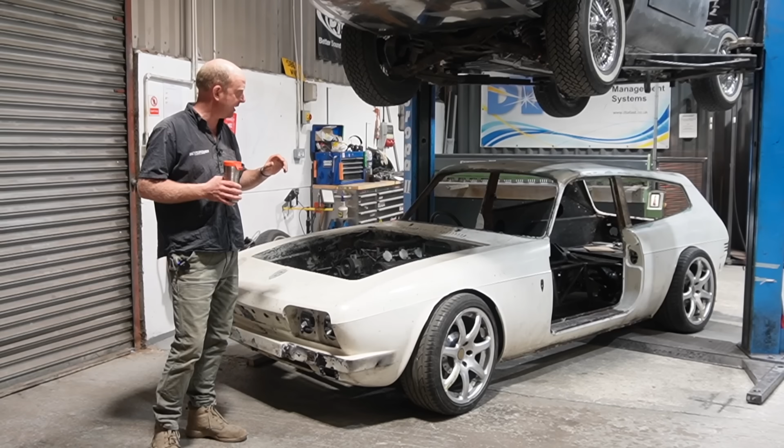The next phase of work on the Scimitar was on two fronts. One is to continue with the chassis, the second was the body.

You may recall from previous episodes we had a visit from Penta Patterns just up the road in Hinckley, to come and have a look at this body shell and give us what is known in the trade as an ROM, a useful term where nobody in this business really likes to give a quote, because a lot of the work can be quite open-ended.

However, obviously there needs to be an analysis of whether such work is vaguely within budget or not. So to deal with that, one would come up with a thing called a rough order of magnitude. And Penta have gone away and come up with an ROM for the work involved in making the parts for this body, and that ROM is within the realm of what we were hoping.

So that is good, because we were getting a little bit concerned as to the scope of building the body on this. And we now know that it is within scope, and it is within sensible scope.

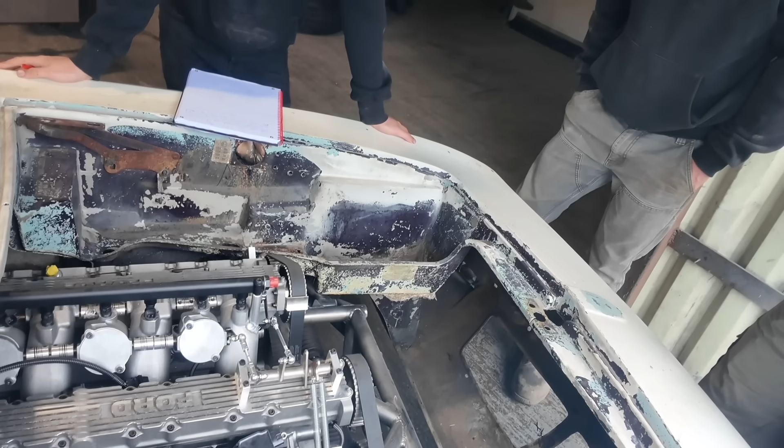So that's a really good progress point. Although it doesn't resolve anything from a viewer's point of view of things you can look at, it resolves a lot of things from our stress point of view and a forward path for the project.

So that's really good. Really the next pile of work in terms of the body relies on CAD, so that is going to be George. However, George is working on this - we'll come to that in a minute.

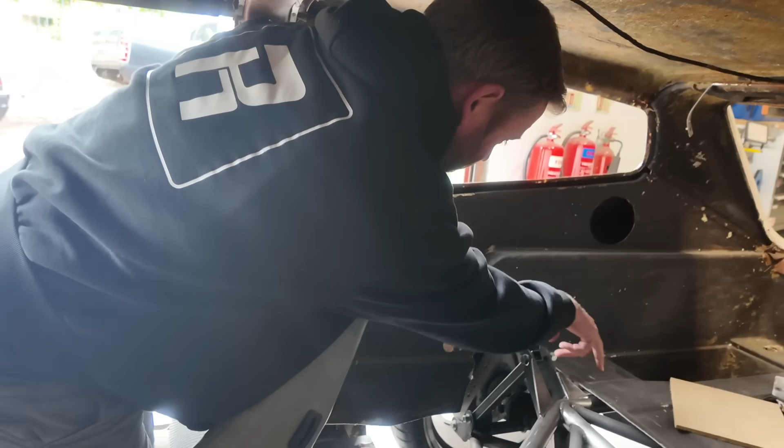Secondary to that, I need to do some work on the chassis. I wasn't rushing into it, because if the ROM had come back horrendously beyond what we had planned on the body, we'd be scratching our heads and coming up with an alternative plan. But it's not, so that's good, so I can get on with work on the chassis.

To that end, Luke has been down and done a very quick little scan in the cockpit area, because as you'll recall from previous episodes, the owners of this vehicle - there are three of them - visited.

We had them all try seating positions, and I built a very crude little support for a steering column. We fitted a gear lever and fitted a seat in a rudimentary position, just so we could trial the seating position and the pedals, and find out what was feasible, what wasn't, whether it was acceptable or not.

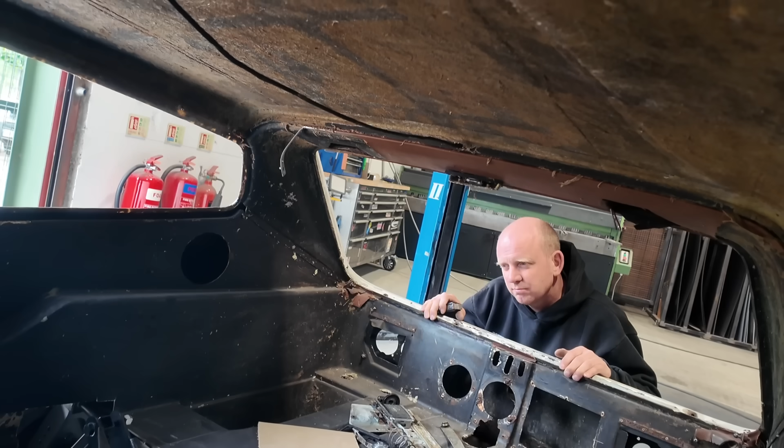That was finalised, positioned the steering wheel correctly, and now we've captured the location of those parts, the seat mountings, which are actually wooden blocks at the moment because I had to space that back up. We dropped it to suit Cal's body height and get him comfortable head clearance wise.

Actually, the owners are smaller and wanted the seat higher, so we've actually spaced the seat back up. But we've now captured the seat positions, the steering column position, the gear lever position and all the surrounding bits of car, so we've got a reference for where they need to be.

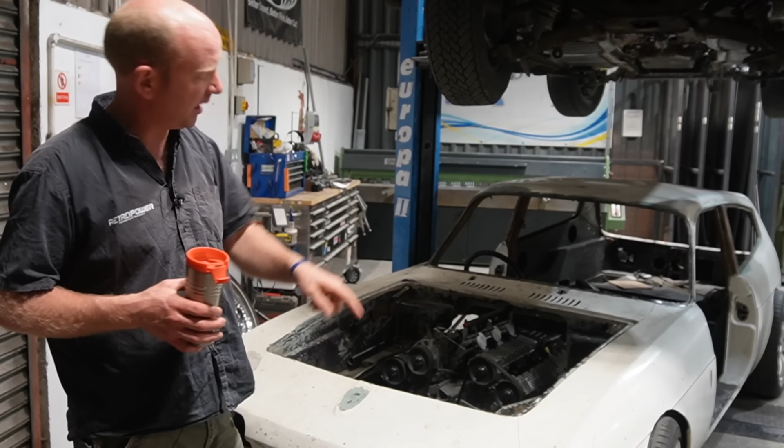Because the next phase is I'm going to be removing all of that, removing the body, removing the engine and the gearbox, removing all of the bits of running gear, and I'm going to be putting the chassis onto our fabrication table and doing some work around the modifications to the chassis.

That was always likely to be the case, and the chassis modifications are not because we're not happy with the chassis. We were in a chicken and egg situation when discussing the chassis with Ian at Sportmotive, in as much as we needed a start point, and we weren't about to design the entire car from scratch in CAD with no initial start points in place. The initial start point was always planned to be a lengthened Sportmotive TVR chassis.

There were a couple of areas where that chassis struck me that it would need modifying at the time. I could have got Ian to modify that, but I didn't know how to at the time because I didn't have an engine to trial in it. So there's a little bit of chicken and egg there.

Now we've got the chassis, we've got the body on it, we've got the engine in it, we've done the seating position trial, and we now know exactly what needs modifying. Rather than sending the chassis back to Ian and saying, can you do these modifications, it's a lot easier for me to just do them here. So it's not that the chassis is wrong, it's that it needs to evolve now we have all the parts around it. The only way we could perhaps have done that would have been to do it all in CAD to start with, but actually it made more sense to just do this.

It's changing a few tubes basically. I need to alter a couple of tubes at the front, and I need to move the lower main chassis tubes inboard slightly for the centre section and narrow it. That area is a little bit suboptimal in that we're actually narrowing the cross section of the chassis, which is going to reduce its torsional rigidity there.

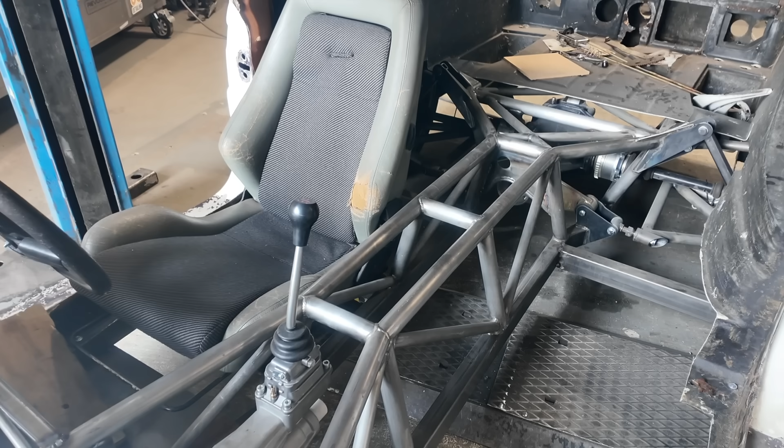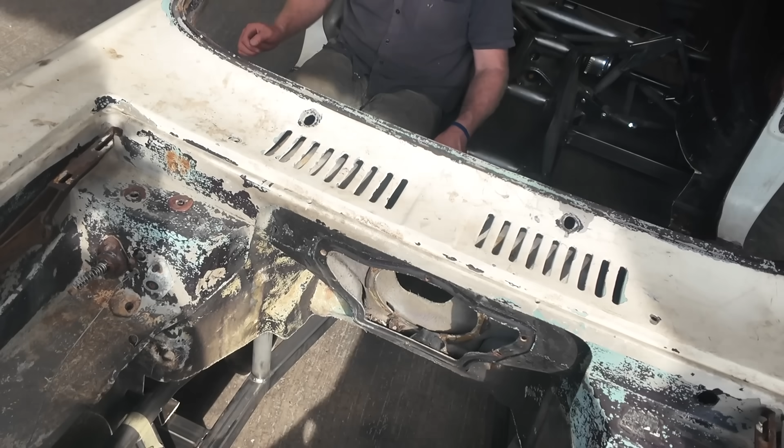However, we are going to box that section of the chassis in more than it would have been on the TVR, which will increase the torsional stiffness, and we are going to be adding the roll frame I mentioned before, and the carbon body. So actually I think we'll more than regain that torsional rigidity we're going to reduce slightly in the centre section.

So anyway, that's where we're at on that. Next week it'll be exploded into lots of pieces again and won't look like a Scimitar anymore, unfortunately, because I've got to take it apart to do that work on the chassis.

Once that's done, then the chassis is done, in inverted commas. It still needs the roll frame putting on, but the roll cage can't go on until we've got the body done, because we're going to scan the inside of the body in order to get a surface.

I think on this particular car, we're going to generate the tube work in CAD, and then have it CNC bent, because it would take me a long time with our manual bender to get the tube work close enough to the body in all the right areas. There's going to be some slightly obscure bends put in that you wouldn't normally have in a roll cage, just in order to incorporate it into this.

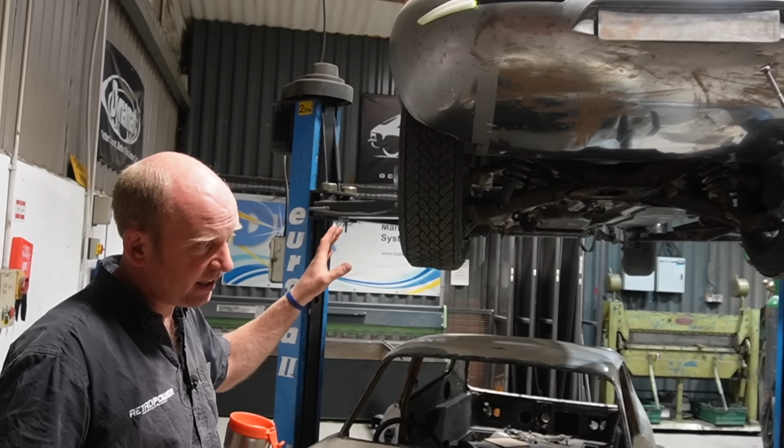That's enough of Scimitar. Moving on to E-Type. Nothing has changed in here. Lots has changed upstairs, so I'm going to shut up at that point, and Cal will hand over to George in a bit, and he'll take you through what he's been doing on that, which isn't HVAC.

Moving on from that, we'll walk past Saab. As I say, Bobby's off this week, so I'm not picking up what Bobby's doing. He was in the midst of the windscreen wiper area, which I think we touched on last week. So I'm going to sign off on that and leave it till next week when we can reappraise where everything's at.

I might get Bobby to do a bit to camera again quite soon, because I think we're all missing Bobby on camera. I've talked about everything he's been doing for quite a while, so I think he needs to do a bit himself, so we might have Bobby on camera next week.

We'll move past this Recaro seat that I've just taken out of the Scimitar and on to the E9.

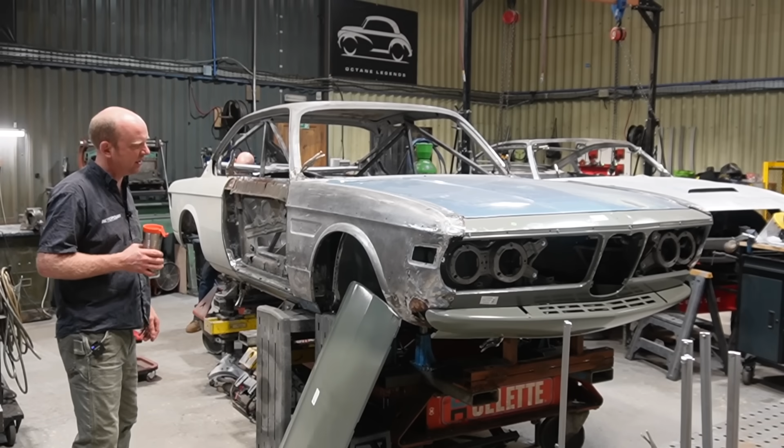There's lots of progress on lots of things here. Stu's absolutely blitzing it - he's running up to a little wall on one bit, stopping, moving on to a different bit, running up to a wall there, and moving on again. It's a multi-pronged attack to dealing with this body shell. Let me put my drink down so I can point at things better.

At the front, you'll notice from last week that he now has the front end more or less on. He reshaped this rather squashed, flimsy front panel, hence why it got squashed - no criticism of anybody, it's very hard to ship a panel like that without sustaining damage. The damage wasn't severe, it had just flattened out a bit, but given the upper and lower panels which dictate its shape, and a touch with a shrinker, that's all back to shape.

So that's all on now, though as you can see it doesn't meet this mangled pre-existing E9 very well at all. That's because lots of things need to be sorted out, most notably the front of these wings, which are in a terrible state. This car had been crashed probably several times and was quite rusty, so the front of the wings were not in a particularly good state.

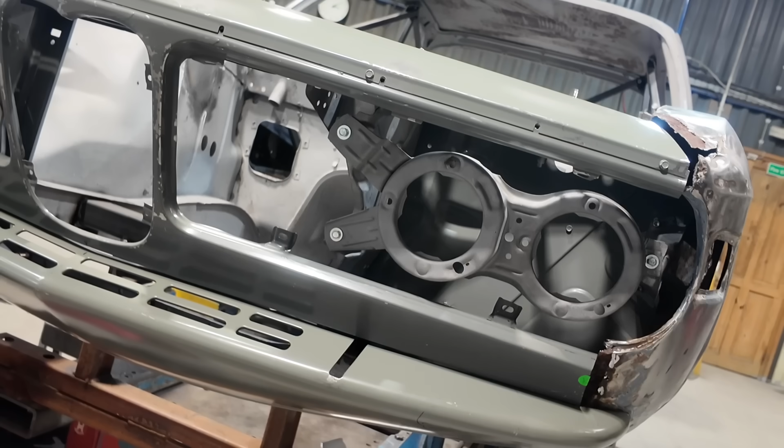In order to line this front panel area up, we need an accurate bonnet. Now this bonnet has been in several accidents, or certainly one, possibly several. However, it appears to be in reasonable condition, other than some very awkward to repair rust at the back. It appears to be the right shape.

However, putting it on and roughly aligning it, the panel gaps are not right. Stu is understandably and quite correctly concerned about trying to line up the whole front end from a bonnet which is questionable. It appears good - we all looked at it and said it looks right - however we really want to double check, so we want another bonnet. That's a slightly open-ended area at the minute, in that we don't have a replacement bonnet, and they are like hen's teeth, very difficult to get hold of.

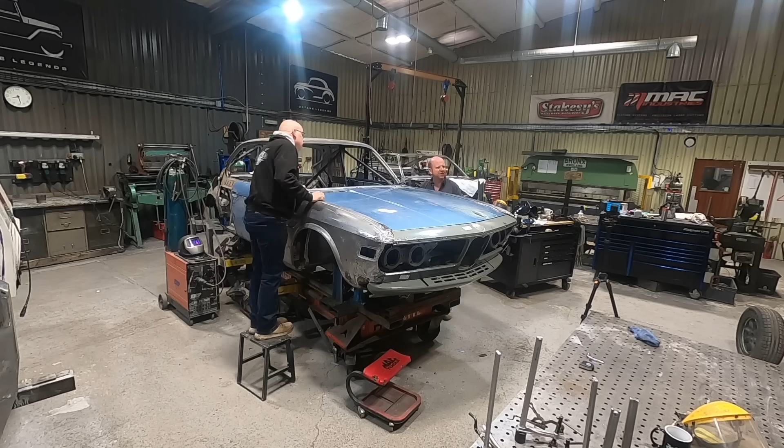Now, fibreglass and carbon fibre ones are available, but we don't know the quality level of them. A very kind viewer of ours - who I'm not going to be able to name because I haven't actually spoken to him - got in touch with Cal to say his mate, a chap by the name of Paul Baker, would be able to help us with some panels, and he has helped us. The only one missing from that is the bonnet - he doesn't actually have a spare, so we still have a dilemma there.

However, I need to make some phone calls, which I've been trying to get onto since yesterday, because there may be other possibilities there. So the reason Stu has stopped work on the front is basically because we need to secure a known good bonnet to give us the alignment for the front end panels, to make sure they're right before we fix this front panel in place and move on to the wings.

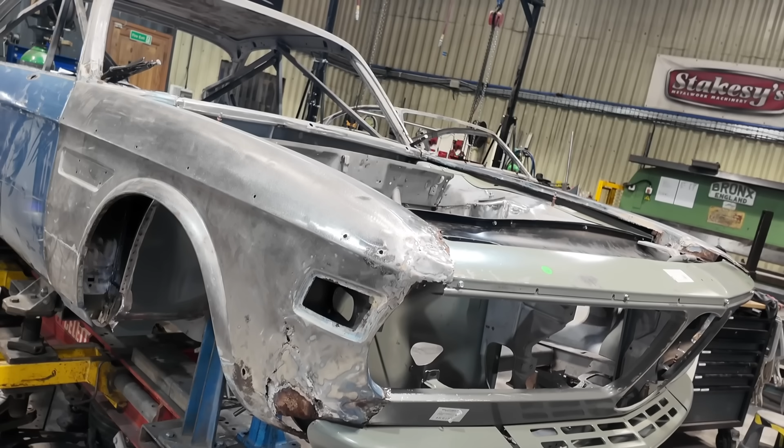Now, moving on to the wings - going back to Paul Baker, who I mentioned earlier - yesterday Martin went down to see Paul and has collected several panels, which we are extremely grateful for. And they're obviously not cheap, they're not going to be cheap - the parts for these cars are incredibly difficult to get hold of.

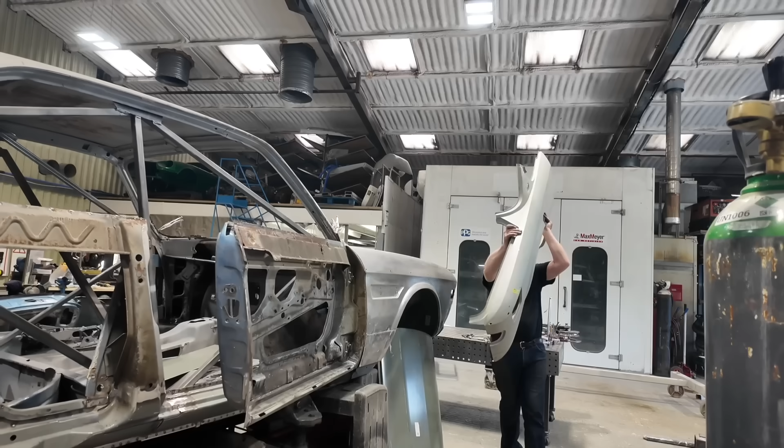But we now have a new old stock genuine offside rear quarter panel, an aluminium boot skin, and a pair of front wings - one new old stock and one basically new old stock. I don't really get the history on the other front wing - it looks like a brand new panel that was fitted to a car and then immediately removed again. It's quite strange, but it's got some little pieces let in where the welds would have been made, some sections to be welded in, but they're all in very good condition - basically as near to a brand new panel as you're likely to get.

So we now have a pair of front wings, which are great, and an offside rear quarter panel - which is the one that really was beyond saving. It was absolutely annihilated, that quarter panel. There was nothing really we could do to save that.

We haven't got a near side quarter - it would have been nice to get one. Paul couldn't help us with one of those, but the one we have is salvageable. It needs a lot of work - an arch repair section, a lower rear corner section and a lower front corner section - but it is repairable. So we now have all four corners dealt with.

The boot lid frame will go again, that's okay. We can use that with a couple of minor repairs with the aluminium boot skin from Paul, which will sort the boot lid out. It's just the bonnet we're stalled on now, so there'll be some further discussions with Paul in terms of sourcing one. Once I've spoken to another chap I'm about to try and talk to, we'll see if we can get something in the pipeline for a bonnet anyway. So irons in the fire there.

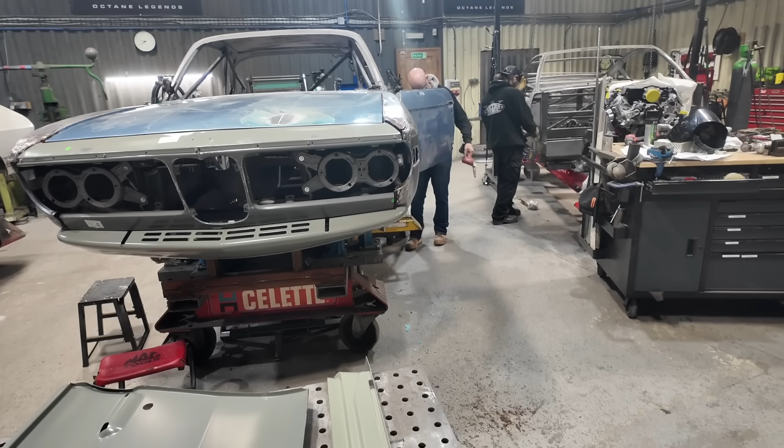So that's what's going on with the front. Moving on to what Stu has been doing - he's moved on to the doors. We've got these door skins from Walloth and Nesch in Germany, and Stu's been piling through the door repairs. This door's pretty good - he's replaced the bottom using an off-the-shelf repair section, which we're very impressed by and large with the sections from Walloth and Nesch. They seem very good, very reasonably priced, very good quality. He's replaced the bottom of this door, and I think he's also started work on the bottom of the other door now.

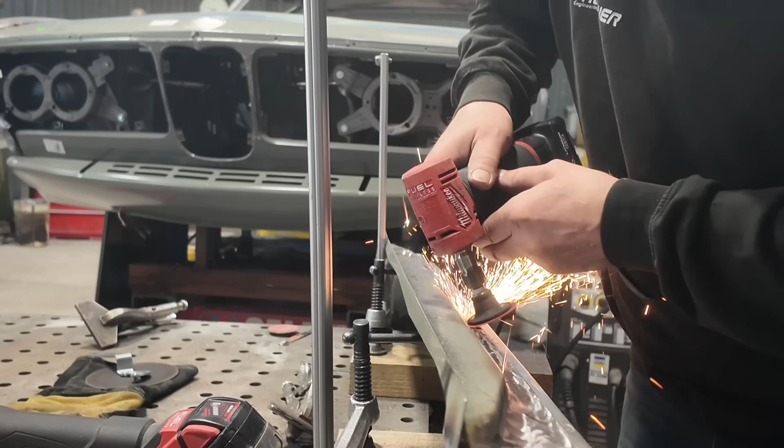But the stumbling point is that on the near side door, this top section - a good way to show it because it's here on show - this section on the other side is completely rotten nearly all the way along. We were just about to make up some little tools to put these sections in, and Cal reminded me we'd better just check whether Walloth and Nesch do them. We didn't think they would, because door frames don't normally rot, but evidently on an E9 they do normally rot.

Sure enough we can actually buy that section as a kit from Walloth and Nesch. As we needed to order a couple of other parts not in the first batch of panels, Cal has now ordered one for the other door, but also one for this side as well, because somebody's mangled this one with a drill - goodness knows what was going on, but it's had a drill thrashed through it in a random fashion. This little pad at the back, the flanges are starting to rot, and the kit for this part isn't particularly expensive. So rather than messing around with localised repairs and risking leaving bits of rust in, we're going to remove this section on this door as well - get it set up on the bench, tacked in place so it can't move, cut that out, put a new section in, put these pads in, and generally sort out any rust pitting.

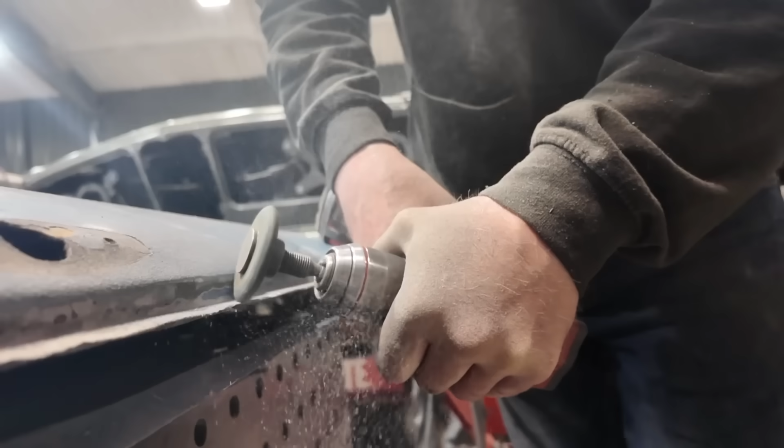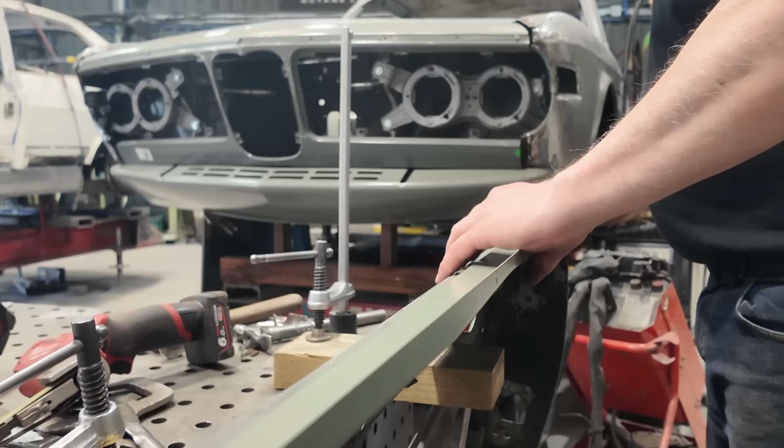Then we've got a really good door frame for both sides of the car - a really good situation, because two nice door frames is a good start point for the doors. We've got the door skins which look like they fit, the lines are all pretty good, Stu's happy there. So really good position to be in, because the outer panel work was always the concern on this car. The structural, internal stuff didn't worry us too much, but the outer panel work we knew was going to be tricky, because they're so hard and expensive to get parts for.

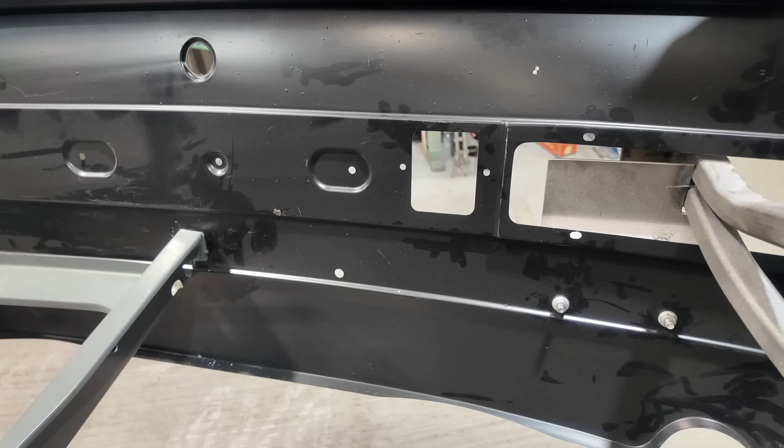Stu's now working on the rear of the car, where we've got a little bit of a hitch - not a major one - and as soon as I finish this video I'm going to ring Paul Baker. He said give him a video call, so I'm going to do that. We're just going to have a chat about the quarter to rear panel joint, because as far as I can see in the only pictures I can find on the internet, there should be a lap joint between the rear panel and the quarter panel. This new old stock quarter appears completely original, and has no lap section for the rear panel, and the rear panel has no lap section either.

Now the rear panel is an aftermarket one. I suspect they're supplied without the overlap section that should be on the ends, and we're just going to need to add that on. But I'm trying to keep it - although it's a Restomod, we're trying to keep the outer panel work as near to factory as we can, so I don't want to start modifying anything too much if I can help it, keeping it looking crisp and clean and as per original. So I want to find out how that joint should be, and whether we're missing a bit off a panel. I don't think it's the quarter, because the quarter looks exactly as per original. I suspect there's a bit missing off the end of the rear panel. But yeah, very good progress - things are coming together nicely.

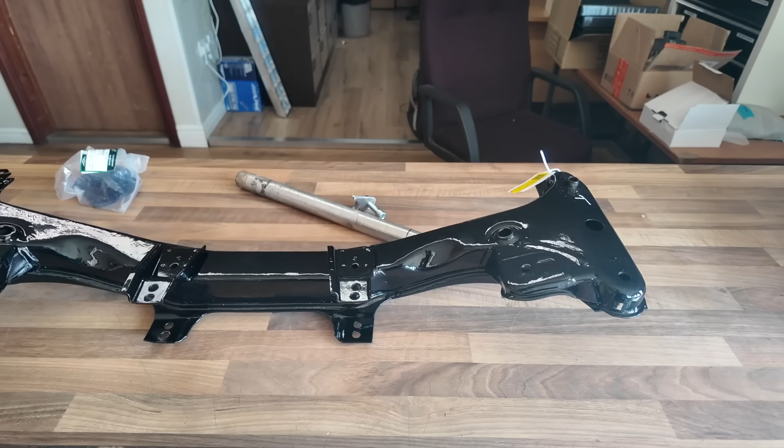Last thing on this - we've now also picked up an E30 front crossmember. We were short of one. Tim Pollock at Classic BMW Spares had one, but we didn't get it - we picked one up from somewhere else we've had various parts from before, since we were heading that direction anyway. The one from Tim's was powder coated, and I thought it seemed a bit daft to buy one already powder coated just to blast the coat off again, since we need to blast it anyway to do our zinc metal spray. Didn't want to buy an already powder coated one that he could sell to someone to bolt straight onto a car, when we're going to blast it.

However, the other E30 one we got turned out not to be an E30 one at all - it was actually an E36 one that had been fitted to an E30. So we've gone back down to Tim and picked up the E30 powder coated one, which we'll use for now. So you'll see a nice powder coated crossmember going on this car soon, which will have the powder coat blasted back off when we get to doing all the underside work. So that's where we're at with running gear and outside panels.

Really the next stage in terms of structural and running gear is the rear end - getting the rear dampers, the rear coilovers, which are the E28/E34 type, fitted and working out how we'll do the rear turrets, because we're modifying the original ones. We have to cut a much bigger hole through the rear chassis leg and rear inner wing to fit a bigger turret, which I think will come right up to the parcel shelf area, tying into the parcel shelf and rear bulkhead, and probably adding tubular bracing in the boot area, because these cars were notoriously weak at the rear end - tying the turrets into the rear bulkhead and parcel shelf structure, and into the rear differential mounting, to strengthen all that area up.

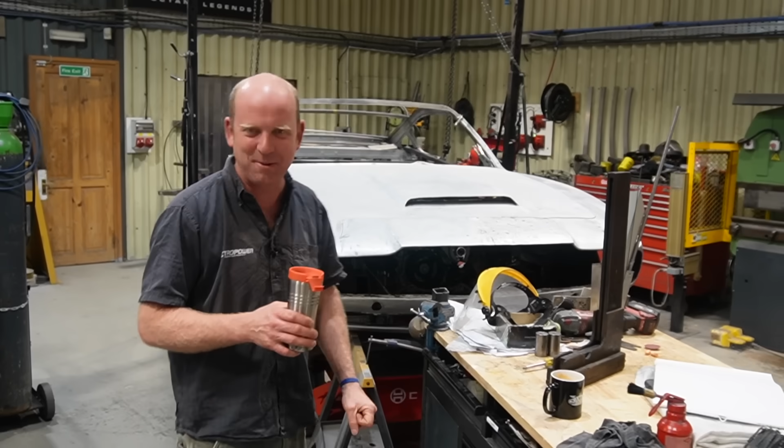And onto the Aston Martin.

As I say, Matthew is currently at a very wet Ashby Magna steam rally, having had a Land Rover breakdown on the way there, and he's got his little tractor on the back on his trailer. From the last message I saw from him, he's just cracked into his ciders to alleviate the feel of the rainfall, but I think the weather is supposed to be cheering up, so he'll be happy about that, and there'll be a lot of steam engines rolling up. I think a few of his mates are turning up in rollers - he showed me a picture of one of his mates' Invicta steam rollers that's turning up there, that he's roading over there. So he'll be having some fun. I think a couple of us are hoping to go over on Sunday, but we'll see. I've potentially got a house move on the cards fairly soon as well, so we've got quite a lot on.

Anyway, on to the Aston Martin.

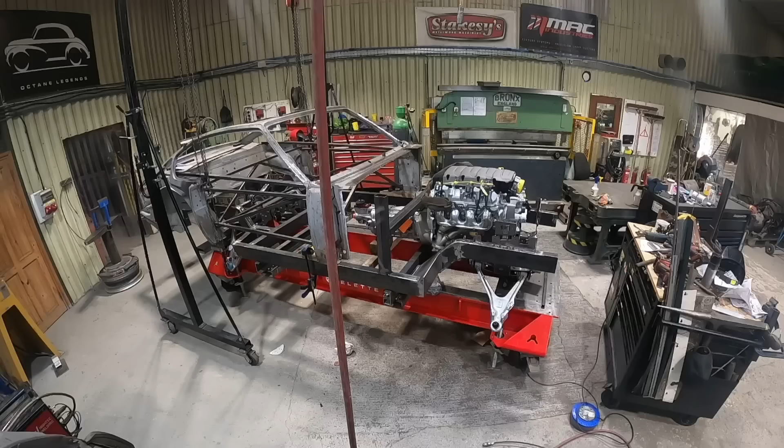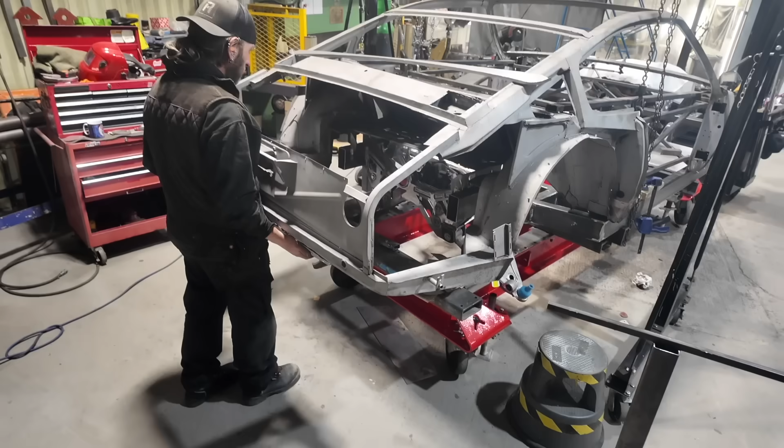As you can see, it's got some sort of bodywork and some very strange wheels on it. There's reason behind all of this - the chassis is basically at the point where we could bolt all the suspension on and get it rolling. We now need to absolutely and very carefully finalise the position of the body tub, the original Aston body tub, onto that chassis. If we get that wrong, we'll have a problem, and the wheels will be in the wrong places, because they're dictated by the chassis.

The body has the wheel coverings, the wings and the quarter panels attached to it. If we get that in the wrong place, the wheels won't be in the middle of the arches. We've got the CAD, we've got the scan data, we have lots of things digitally, but none of those quite substitute actually having a look and seeing the real parts in front of you. Sometimes it's best to just double check these things if you can.

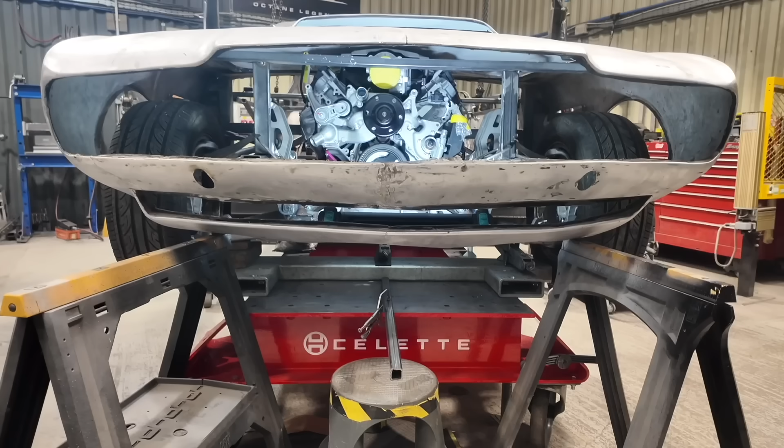To that end, we've picked the Aston aluminium bodywork down from the mezzanine. Obviously ignore the front panel, it's a terrible state - remember, we have a replacement for this waiting to be grafted in that we got from ASR Motor Body Engineering. The bonnet's absolutely mullered too, needing a huge amount of repair work, so don't pay too much attention to that either. But underneath that bonnet, we have a Chevy LT1 engine nestling in there, and the Tremec transmission, and the front suspension all bolted on.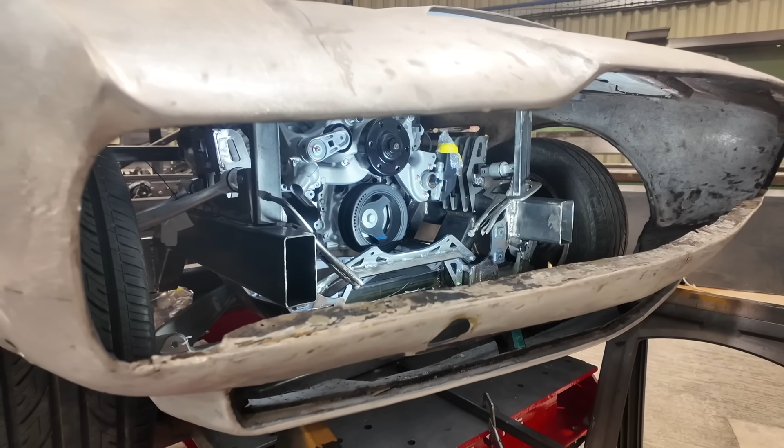So, Corvette C7 front uprights, which don't really fit inside these 16-inch Jaguar wheels - they kind of hit the upper ball joint, but they are basically on. We have C7 uprights, C7 upper and lower wishbones, all bolted on in place. Everything went together fine, all as you'd expect.

We've now put the front bodywork on, and we now need to move the body forward by around 10 millimeters. Going straight into the detail, within the CAD and scan data, there's a little bit of an error. We don't exactly know where that error's from - probably the scan stage, I'd say, given that the body shell we were scanning was pretty poorly. So we've got about a 5 millimeter difference between front and back, a total of a 10 millimeter error, and we need to average that error out.

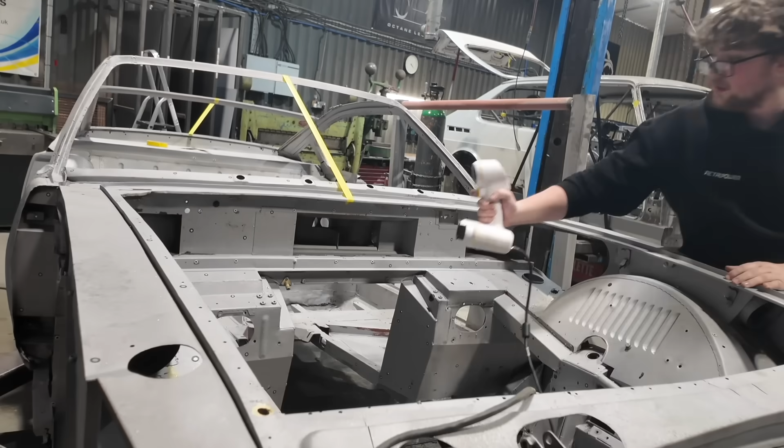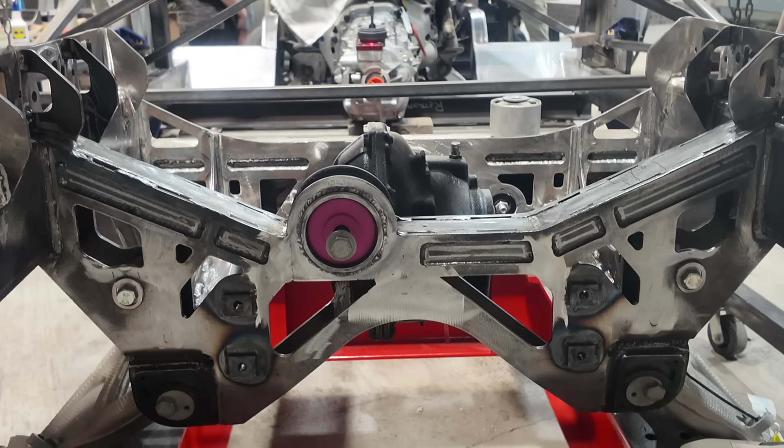At the moment, the body isn't fitted, it's just resting on - but it's resting about 10 millimeters further back than it should. So we need to deal with that. To do so, we actually need to slightly modify the H frame, which supports the A pillars, the dashboard, the bulkhead and the pedal box - a frame of 75 by 50 millimeter box section. That needs to be moved forward by about 10 millimeters, because it was mounted based on the forward half of the data, if you like, and so to average out those errors, we need to move that box section forward a little bit.

Once that's moved, we were going to sink that box section into the structure of the forward edge of the A-pillar, but the A-pillar structure becomes pretty complicated in that area. It's actually going to prove easier to just move that frame forward slightly, the crossbar up very slightly, and then move the body forward slightly, and everything should line up.

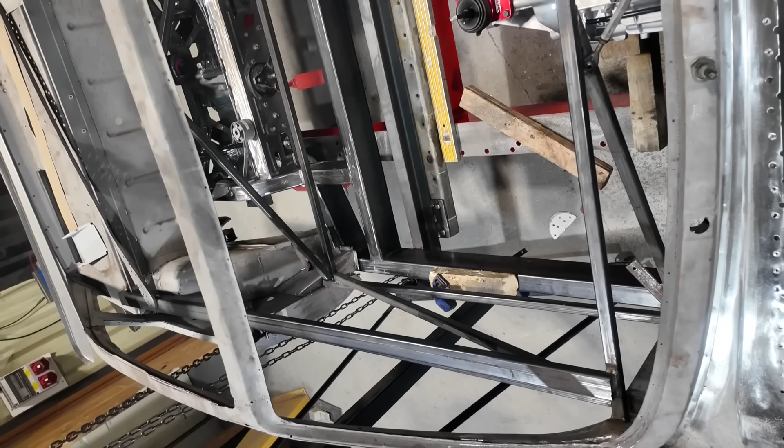Once we've done that, we're going to get the body clamped in place, and then on one side at the back we're going to cut out the rear inner arch. We've been hesitating to do that because it'll weaken the back of the body a lot. However, once that's in the correct place, we have a support in under there to carry the back of the body. Once that's tack welded in place, we can then cut out the rear arch, which will then mean we can fit the Corvette upper wishbones.

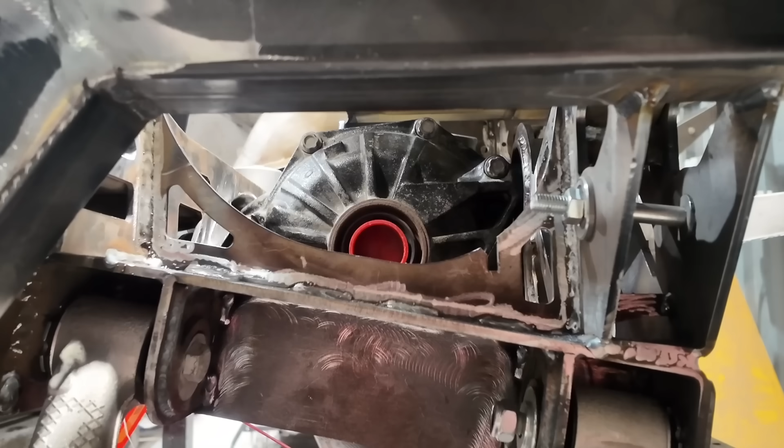We've already got the Corvette lower wishbones fitted. We can fit the rear uprights, fit a rear hub and wheel, and then put the rear aluminium bodywork on and verify that the wheels are all sitting exactly correctly in the wheel arches and that there's no unexpected things.

None of this is a massive problem. It's just making sure there's nothing unexpected and that the CAD hasn't led us down the garden path by a scan or CAD or things. It's better to put it actually in the flesh and double check. So we're going to do that.

Once we're certain that's all correct, the aluminium bodywork will all come back off again. We can get rid of the horrible Jaguar wheels again out of the way, and then we can get on with all of the rear end fabrication, which I'm really looking forward to.

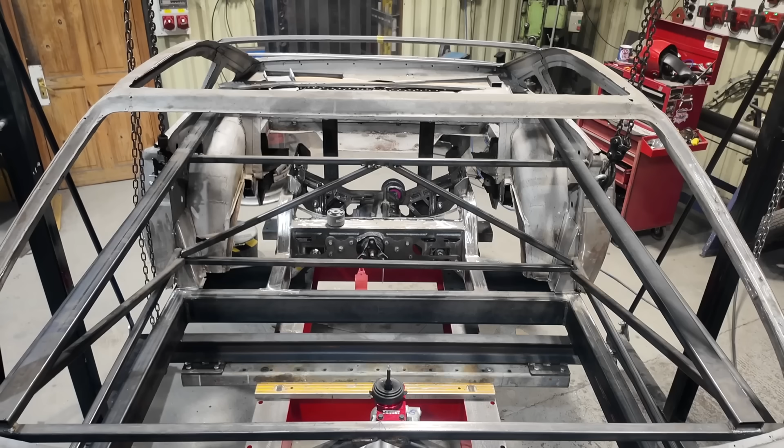Actually getting this body attached to the chassis and getting onto some of the sheet metal work and starting to make it look like a car and less like a climbing frame, because it's just not a very pretty thing to look at with all that box section welded amongst it at the moment. Also removing some of the horrendous Jaguar factory metalwork from the back would actually be quite nice, because some of the welding is just an offence to the eyes. It's really not very nice.

So we're going to remove the rear tubs. Matt's already removed the rear bulkhead section. We'll remove the remains of the rear chassis rails that go to the rear panel, remove the rear valance, rear panel, basically remove pretty much the whole rear end.

And we're going to fabricate new tubs, which won't have splits and welds all the way around them, a new rear bulkhead, new chassis rail extensions from the new chassis out to the rear corners and to pick up the rear panel. It'll all be nice new metal, nice new shapes, pretty stuff done neatly, nice reinforcing beads, and just some nicely thought out sheet metal work going on in there. So that should all come together very nicely.

Moving on from that, in the body prep area, Gaz is working his way through. He's been doing some other little tasks as well, but he's working his way through the flat and polish of the Jag, and I think he's pretty much got, other than one front wing by the looks of it, he's pretty much there with all of the flatting now. He's pretty much getting to the stages of polishing when he will be sealing himself up at this end, sealing off all the workshop grit from in there and getting through mopping it all.

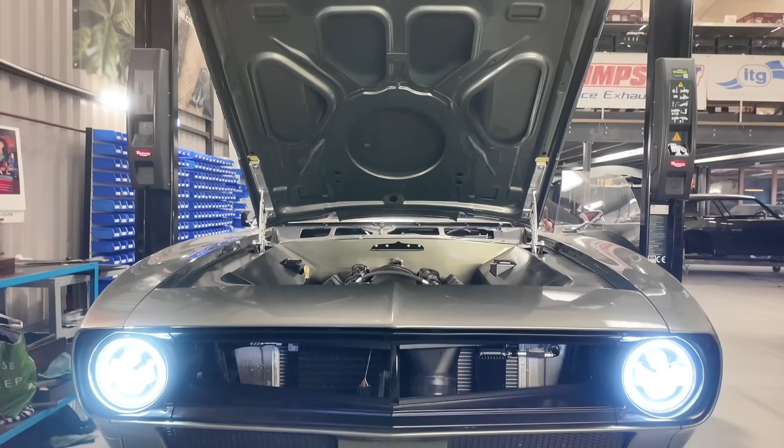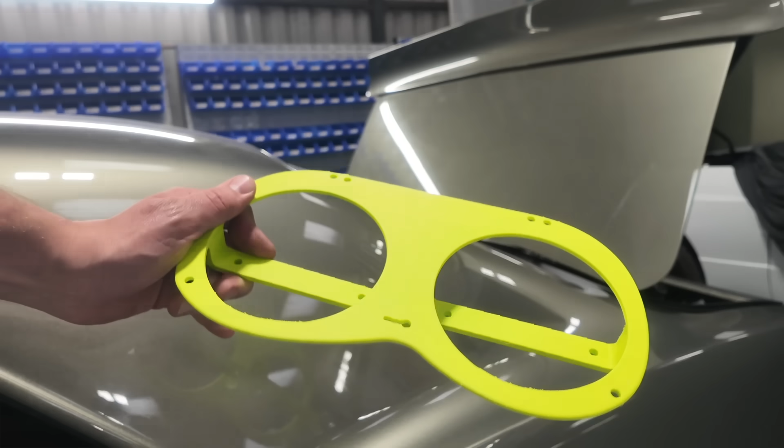He's also now finished the design for the warning light modules. There are 3 separate pieces that sit at the top of that - one with 3 lights between the instruments and one each side, which will have things like the indicator telltales, oil pressure warning light, maybe a charge warning light. So they're just being 3D printed by ProTotal at the minute, who we use for 3D print stuff when we want a really nice visual finish, because that will be the final finish on those parts.

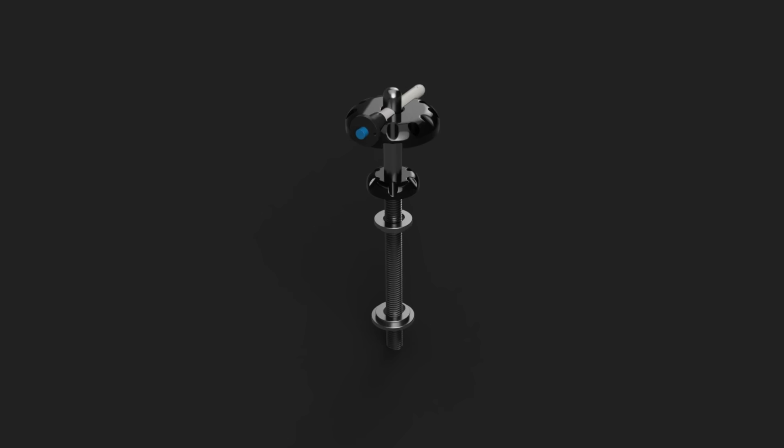As soon as that's back, all of the dash can go together. We've just sent off the bezels that sit around the bonnet pins for anodizing, and as soon as they're back we can get the bonnet pins in, attach the bezels on the outer part of the bonnet, and we'll be pretty much ready for testing then - it fires up as is. I think the only other thing we've got to do before then is fit the oil pressure and coolant temperature senders, and that'll be ready for the road, which is good.

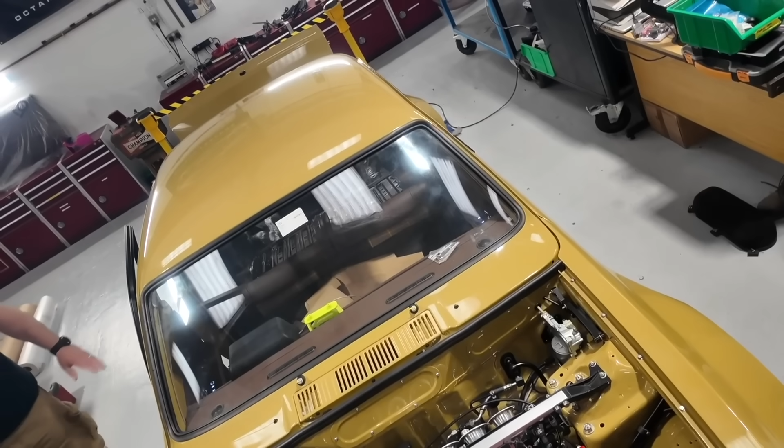Speaking of things firing up, very excitingly we fired up the Allegro for the first time this week. I think we just had it fired up prior to last week's video going out, but didn't quite catch it in time. Due to the culmination of some good work all round, everything went very well, and it pretty much just fired straight up, idled smoothly, no horrific noises. The only thing that scared us a little is the starter motor was a bit lazy - I think it was just catching on the flywheel slightly and making an odd noise, so we've taken that back out. I think it needs freeing up a bit. We swapped it for the one on the other car, and that one works perfectly, so it's just a little bit sticky for some reason, even though it has been rebuilt.

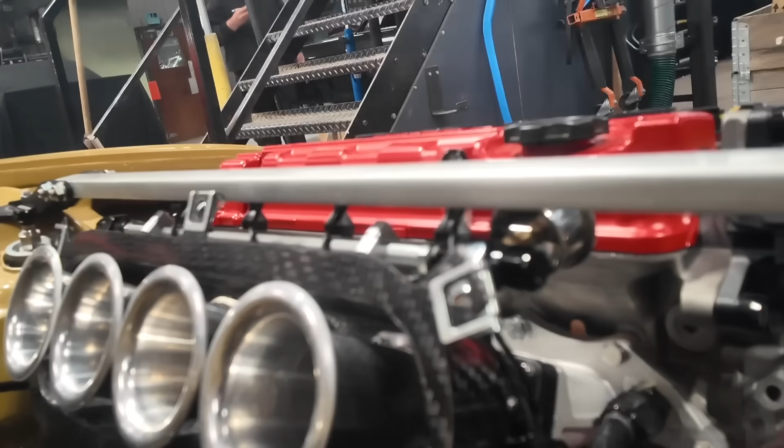So yeah, all very exciting stuff. We also did the fairly nerve-wracking operation of seeing whether the VTEC was working correctly. Because if you remember when we showed that engine disassembled, it's quite a complicated arrangement of oil-actuated pins that move across to attach one set of rockers to another set.

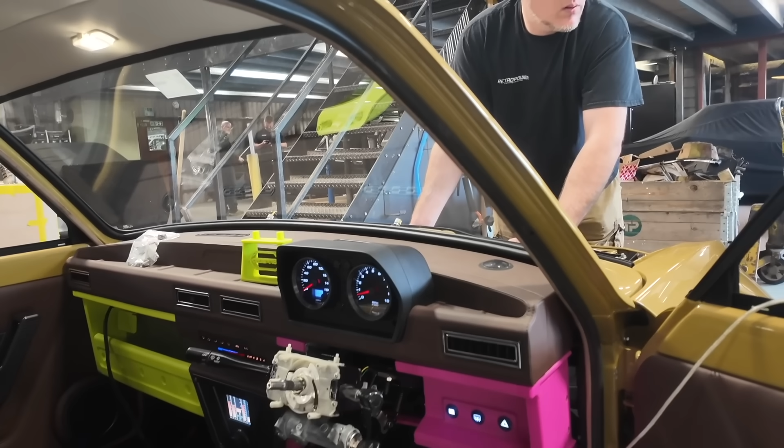It relies on there being a reasonable amount of oil pressure in the engine. Normally in use, the map on the ECU tells the solenoid that initiates the VTEC what RPM to kick in at, but we can manually override that. So in theory we can kick the VTEC in at any RPM, but it does need the oil pressure to be over a certain level to actually have enough pressure to actuate the pins.

So yes, I had the nerve-wracking job of basically revving it up to probably about 3,000 or 4,000 RPM, and then having Alex manually actuate the VTEC, at which point it was like, will it work perfectly, or will we have valves smashing into pistons from fire and brimstone? But no, it clicked, and you could hear the change in tone as the cam profile changed, and undid it and went back again. So that is good.

So then they've been going through, just doing a few refinements on things. We noticed the alternator was overcharging, and again we swapped it for the one on the other car, and that one's fine. So it seems like one alternator and one starter, despite all four of them being rebuilt by the same place, is not doing what it should. But we've got the one that's charging correctly on there now.

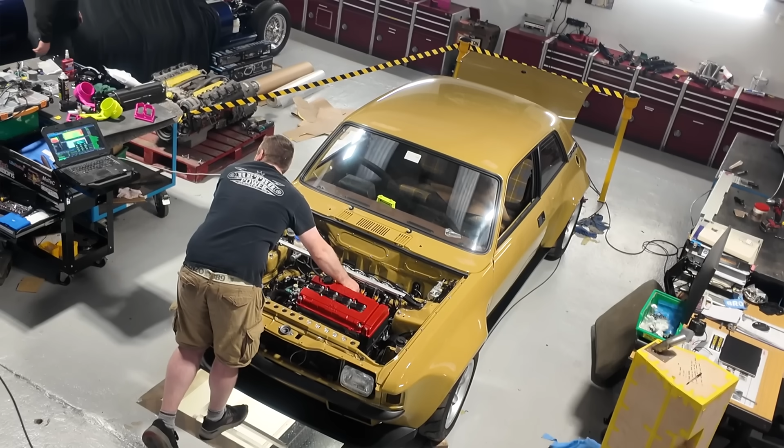Electrically everything looks good. We've been doing a few edits to the vacuum chamber, which holds the idle control valve, because we didn't realise one of the elbows we'd used was very restrictive. We were only seeing like a 200 RPM difference between essentially a fully open idle valve and a fully shut idle valve, which took us a while to get our heads around.

But we realised in the end that if you just had the pipe completely removed, you'd have a 600 RPM difference, but if you took the idle valve off the reservoir and plugged the pipe into it, it was only 200 RPM. It was actually the push-fit elbow where the pipe went into the reservoir that was the issue. So we're resolving that.

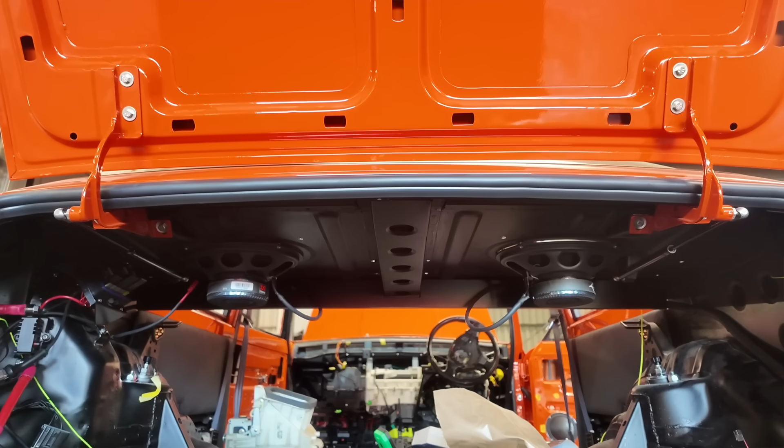Steve's just been finishing off, for both cars, the amplifier wiring harness, and this one's done to the point they were able to fire it up and get an initial calibration into the Audison system. We're running an 8-channel Audison amp on these, with separate channels for the tweeters, the bass drivers in the doors, and the components in the rear.

Such that we don't need to use an external crossover to split the frequency between the tweeter and the bass driver, we program that into the Audison. So we've done the initial calibration on that, and that is all working well as well.

So yeah, it's really kind of exciting. We just need to get this idle control valve vacuum plumbing sorted, and I think at that point we're going to be pretty close to being able to try chugging it around, make sure brake and clutch and all that sort of stuff works as it should, and then probably head to the rollers, which will be equally nerve-wracking and exciting. Right, I think on that note I'm going to hand over to the CAD Den and see what's been going on there.

Cool. Hi guys, and welcome back to the Fusion Festival. This week I'm going to kick it off with the reason I'm not in work uniform and I look a little bit like Saddam Hussein with the unibrow.

I am currently downstairs sanding the carbon arches on the Allegro on purpose. I'm currently up here - I was downstairs sanding the carbon arches on the Allegro.

The indicator vents, which I think I talked about last week, getting finalised, have now been ordered through. We did an outsourced 3D print through a great company called ProTotal. They have been absolutely class in both the manufacturing quality of what we've had delivered so far, because eagle-eyed viewers might remember we outsourced to a different company a little while back and it was shocking. We got it back and honestly we just ended up 3D printing that part in-house in the end because it was that bad. ProTotal, on the other hand, not only are brilliant in terms of their quality, but they've also been brilliant in terms of giving us advice on manufacturing parts that even maybe they can't manufacture, but they will know people that can.

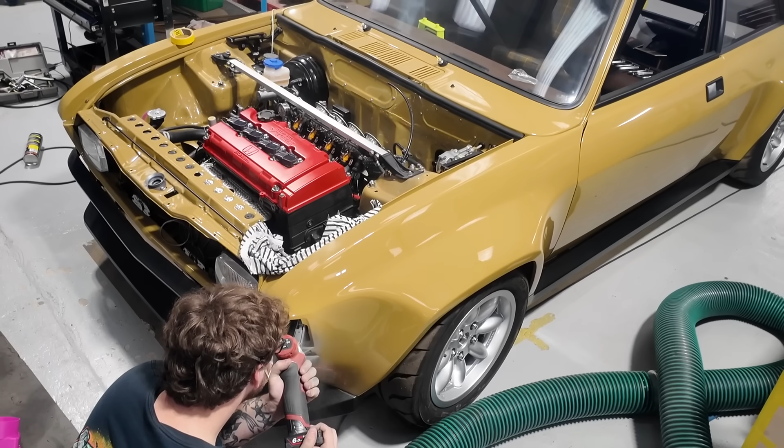Now that I have an actual final prototype for it that's been signed off and ordered, I can go ahead with using that prototype to scallop out the aperture to the correct shape, and then when they arrive they're ready to basically just go straight in.

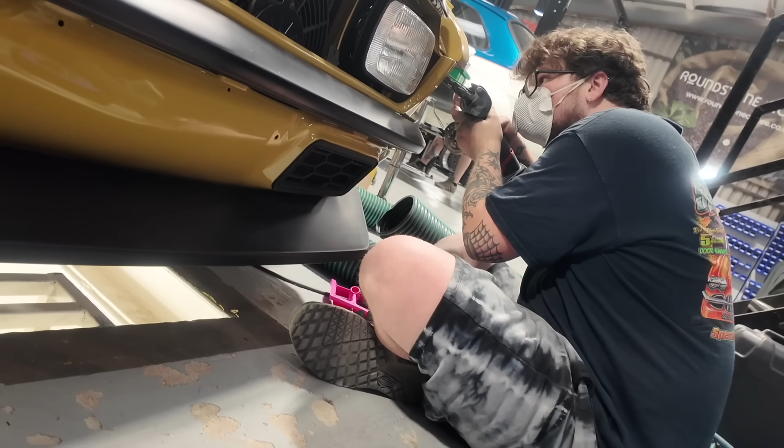Yesterday I put the lower vents back in that car. All the wiring down there was completed and they don't need to get down there anymore, so I put those in. They look awesome. They were also from ProTotal, so thank you guys again. I think that's it for the Allegro.

Moving on to Churchill, a job that I was putting off because I had other stuff to do, but a job I've picked back up again. I was kind of dreading it, but it's gone relatively smoothly so far - the Churchill door lock mechanism.

Here is the handle for the original Mark II Jaguar, and that is the Jaguar lock barrel. As you probably know, we're not going to be using standard Mark II Jaguar locks on this car. We are using central locking and a more modern lock mechanism, so my job was to convert the original Jag door handles and lock mechanism to use the new push button and the lock barrel, to then use the more modern, I think the X300 door locks that we have in the Churchill Jaguar.

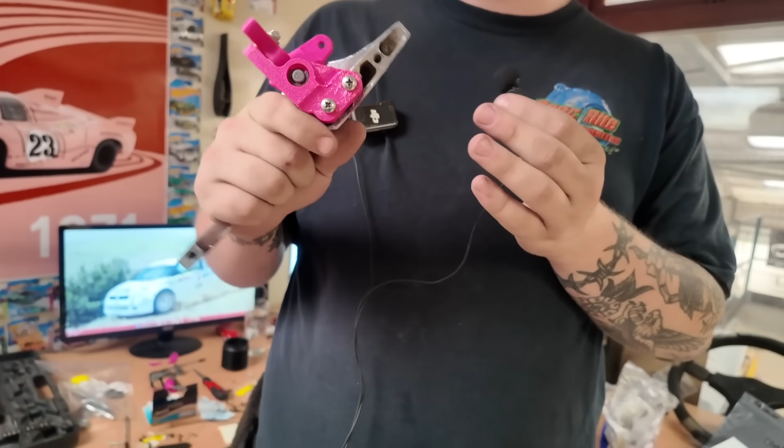The way I've done that is pretty simple. Push the button in, that pushes on the crank, which in turn presses down on the unlock on the car. The other function it does is in the car you have a manual unlock, so you turn the key, that presses down on that, and then you can unlock your car manually.

Given that the battery dies or something like that, you always want to have a manual way of doing it. So I'm just now waiting on one ball joint to come so I can prototype that in the car, and then that should hopefully be good to go.

That's not it for cars at Retropower - I've also completed the first iteration for the alternator bracket on the E-Type. Sounds like a pretty simple job, but...

Both the mounts for it are in quite weird places - you've got two on this side of the engine, one on this side up here, and one on the inside on this side of the engine set in a bit over here. So number one, you have to get those in the exact right position.

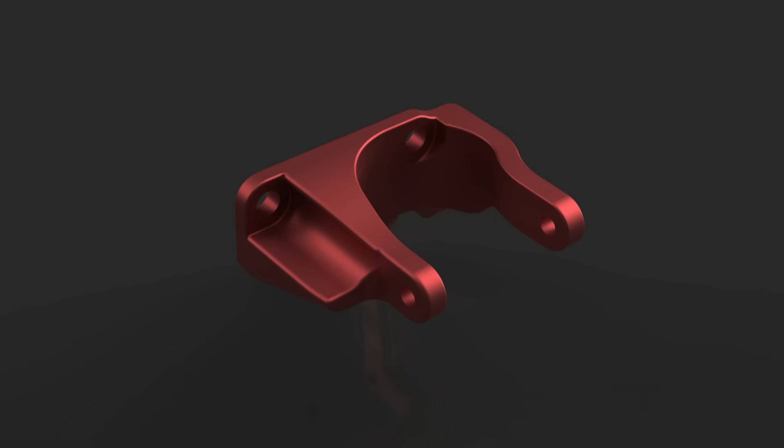The other thing is alternator brackets need to be fairly beefy, because the alternator is quite heavy and they have a tendency to shear off. So the other challenge I've had is making it beefy but in a way that actually fits, because as you would have heard me and George say many a time for this car, that's pretty difficult.

So more on that in a minute. More on that in a minute from George.

So yeah, that is now ready to prototype, and hopefully that is both beefy enough to hold the alternator correctly - I think it will be - and that also fits all the bolt holes in the correct locations.

That is it for stuff at Retropower this week, because I've also been doing stuff for the Den. Number one is an ex-Retropower car, the Quattro. That's had a new gearbox in and in turn a new shifter.

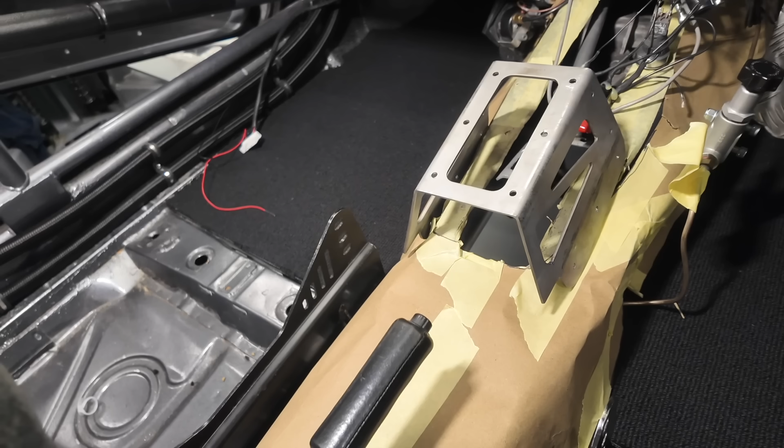A few weeks back I scanned the tunnel, and I think last week I told you I did the initial design for that shifter mount itself. There was a slight tweak just to change the angle on it, and that has now been made and handed over to the guys at the Den to test fit and come back with feedback, or go 'hey, this is great, well done, Luke.' We'll see.

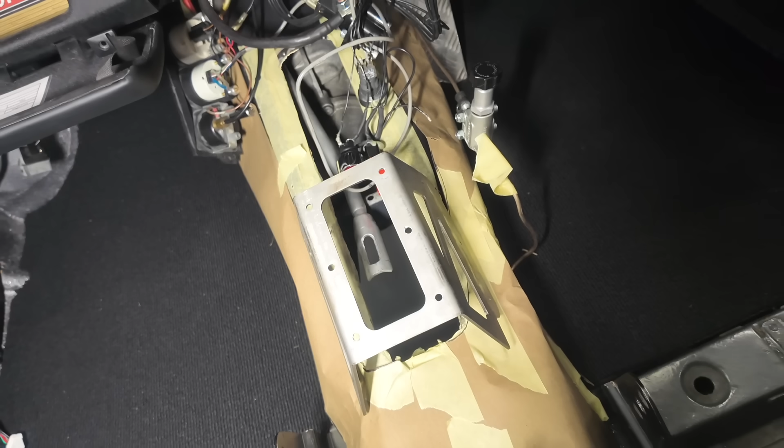So that's over there, and once they've either confirmed that or we've confirmed the changes needed, I can go ahead with manufacturing the rest of that setup, and then they can get that all bolted in, shifter mount in the car, and continue with their work going forward.

Then the other thing for the Den - I think I talked about this before - the Morris mud flap thingamabobs, the stylized mud flaps I did for them, prototyped last week. They were so close to being bang on, I just misjudged - it's got a flange on the inside of the arch, and that tapers down to a point.

And where it tapers down to, I thought it was a lot thinner than what it actually is, but actually the flange comes out a little bit more than what I thought it did. So now I've made a slight edit to that.

That's literally about to finish printing as we speak, and then I can head back over to the Den and test that. Along with that, I've also done those rear light covers as a prototype as well, just to make sure that it does clear anything and there wasn't anything in the scan that I missed. There's also the slight caveat that the emergency boot pull is somewhere around that area, so I didn't want to be impeding that, and I did want to test that, so that is also on the printer.

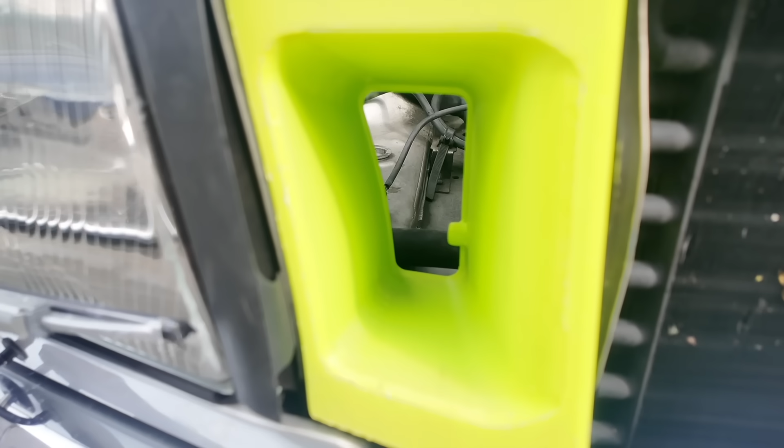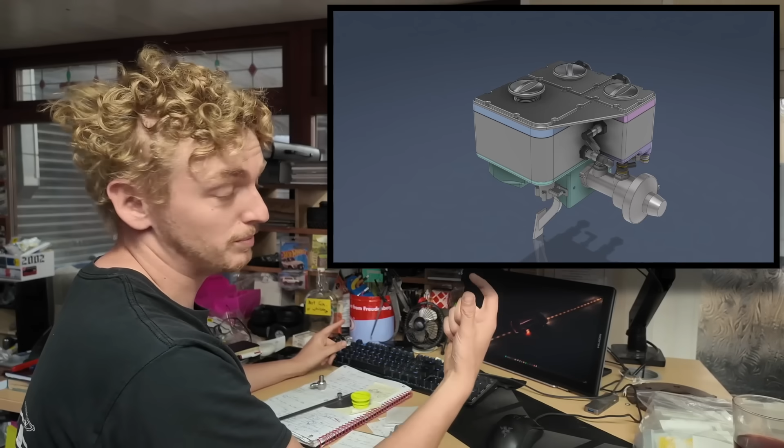That'll be billet, which supports a slightly different pedal to the standard one. But what it's also going to do is be the housing for some tanks. So this dense little piece of design has got the mount for the pedal box, the mount for the master cylinder, the mount for the washer motor, the washer pump. It's also the washer tank, the breather tank, and the brake reservoir. Not all one tank, before someone says that. They're all separated, resulting in this block of design which has kind of got a lot going on.

And yeah, so I've been working on this, trying to do it in the most effective way. So what we're doing with it is it's going to be billet top and bottoms for all the tanks, and then we'll do a fabricated middle welded in, which is what we've done before on other tanks. It kind of means you haven't got to start with such a huge block of billet, which obviously brings the cost down a little bit.

And then yeah, it's just been generally working through that, general engine bay things. One thing which we're trying to accomplish on this one is, in the past we've developed a system for having it so caps on billet tanks always tighten to the same point.

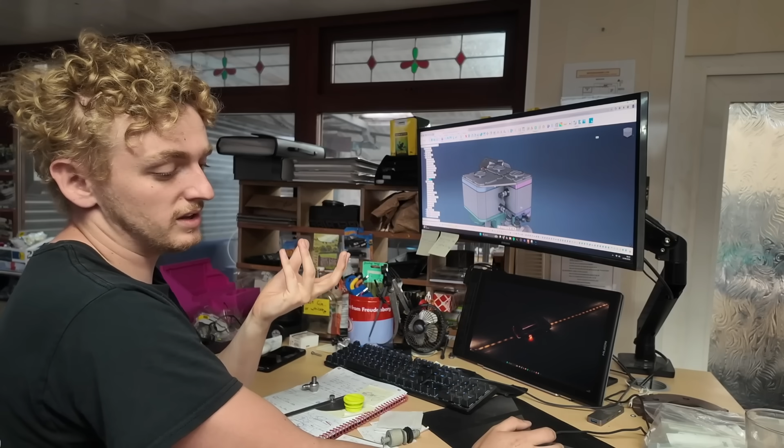So to be fair, I've got a little model here. I think we've explained it before, but it's got an O-ring around the outside, and what happens is you screw the cap down and it bottoms out on the actual housing of the tank, and the sealing is done from the O-ring on the outer face. The problem with that is you can't really tailor where the cap tightens down to, because of the machining of the threads. So a cap like this could tighten up this way, or it could end up tightening up this way. It'll always tighten to the same point, but we don't know where that orientation is going to be.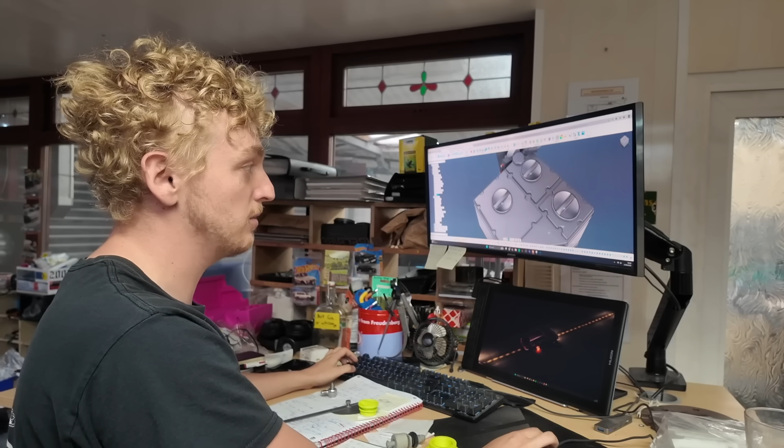On these tanks, I want to run a cap similar to this, which is a shrunk down version of the fuel cap, which then left us the problem of where we want to be able to crank or clock all the caps, like in the CAD here, so they're all facing the same direction. And obviously without getting into the depths of machining, that's quite a difficult thing.

So between me and Nat, we figured out a way of doing it, which is we're going to have a little ring which effectively makes the threads in the tank longer than normal, and have a little ring which will then tighten up to the bottom of this, which can then have a tack weld put on it. That will then allow us to clock where this is going to be orientated to and have it looking like this, or maybe the other way. Just little details like this take a load of time to figure out, but in the end it'll make it just look that little bit better.

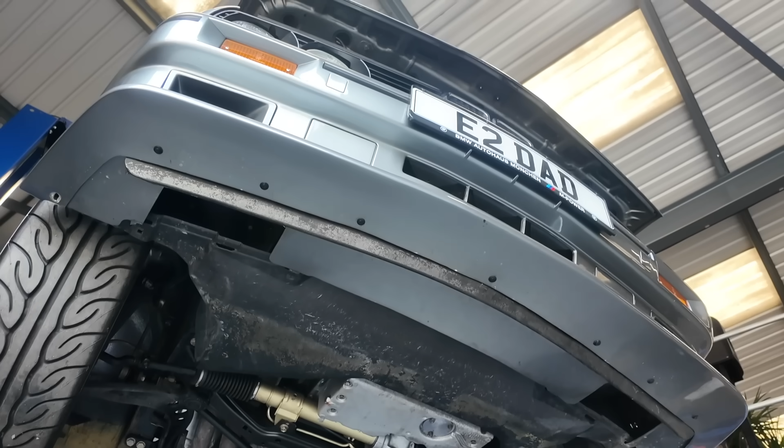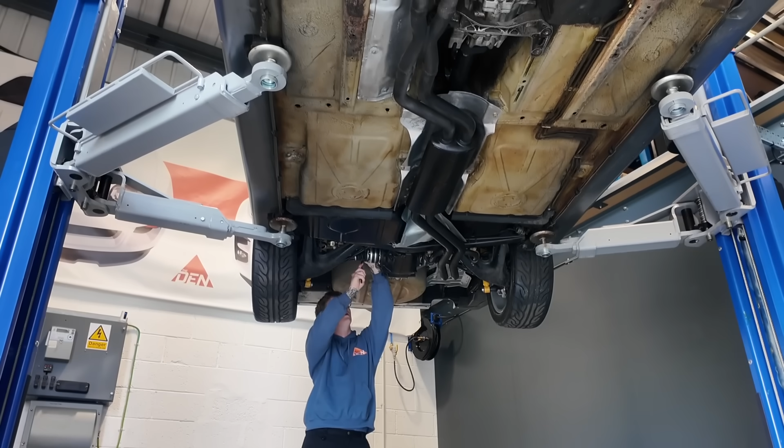Right, moving inside. E30 M3, absolute dream car for me really, as you can probably tell by my E30 over there. This one's a lot nicer. It's absolutely immaculate underneath. This came in for our usual inspection, big report back to the customer. There was no horrors really discovered on this one, a few little pointers here and there.

He's had us just going through some things to absolutely bring it up to perfection. One of the things we noticed was the geometry on the rear, which is not adjustable as standard. So it's a subframe, a fixed beam, which is on rubber bushes onto the car. Then the diff, a mount on the diff, which is like the third mount for the subframe. And then two trailing arms, which are on rubber bushes, which are slightly angled. And there are no adjustments on any of that.

So your camber swings quite a lot during the suspension travel, but essentially you have no camber adjustment and no toe adjustment. And often what you find on E30s generally, when you lower them, you get a lot more negative camber on the back, which you can't dial out. So what a lot of people do is put eccentric bushes on, where the hole through the middle of the bush where the bolt goes is actually slightly off to one side.

And that means you can rotate the whole of that bush within its outer housing and move the point at which the bolt goes through, which, if you imagine that with the bolt actually fixed on the subframe, means it's basically moving the arm in a circle as you adjust it, so it goes up, forward, down, back, which means you effectively get both toe and camber adjustment, and that's what we're doing on this.

So we're putting eccentric bushes on it so we can do a bit of a fine tune of the geometry on the back. So that's where we're at with that. And then mine is on the ramp over there, and miracle of miracles, it does actually have its new fuel tank in, part thanks to Owen, who was working on it a little bit yesterday.

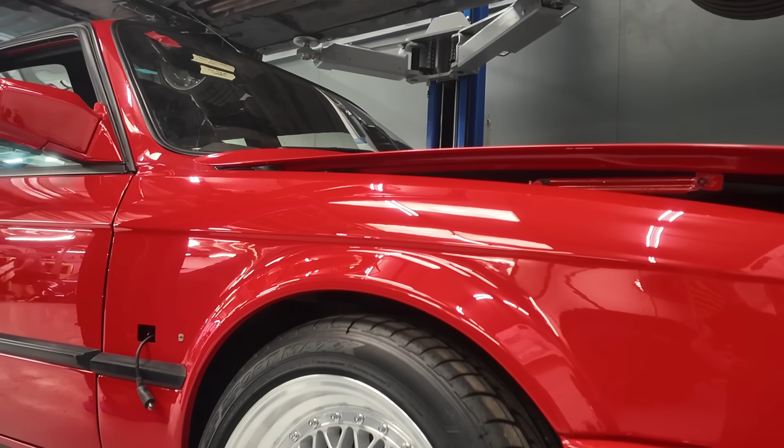But one of the things when I went through it all that caught me slightly off guard is that the inside of the fuel tank was really rusty. So I've pulled the old one out, got a new tank, pump, filter, all of that's going in. I've done the alternator on it now because that was actually the reason it came off the road, is that it stopped charging, and that was years ago.

While I was doing that, I've done the auxiliary belt, idler, tensioner, and then I'm working my way through everything else and inspecting it roughly underneath. I pretty much need to replace everything between the bumpers, I'd say. So I've got on the cards lower arm bushes, track rod ends, I think one of the actual track rods itself, rack gaiters. I think I'm going to need to do, probably as a precautionary measure, brake calipers, probably discs and pads. I need to replace a radiator because I noticed that was weeping.

So yes, as is often the case, for those who work on their own cars will know this only too well. You start with a job list, and each time you tick one job off, in the process of doing that job, you've discovered 2 more jobs, so the job list just gets bigger, which is unfortunate.

Under here is the VR6, which apparently now identifies as Luke's property. I think he'll be very sad to see that go.

And actually, on the subject of Luke, I'm going to hand over to him to talk about the Lupo, because he's been on that quite a lot this week.

Hi all, me again. So the Barchetta has turned into a bigger job. The customer, as you know, I've told you the other week that they wanted some trimming doing inside the car for the storage compartment of the convertible roof. He also mentioned the clutch was really noisy when he was depressing the clutch pedal after it'd done about 70 miles when it was red hot.

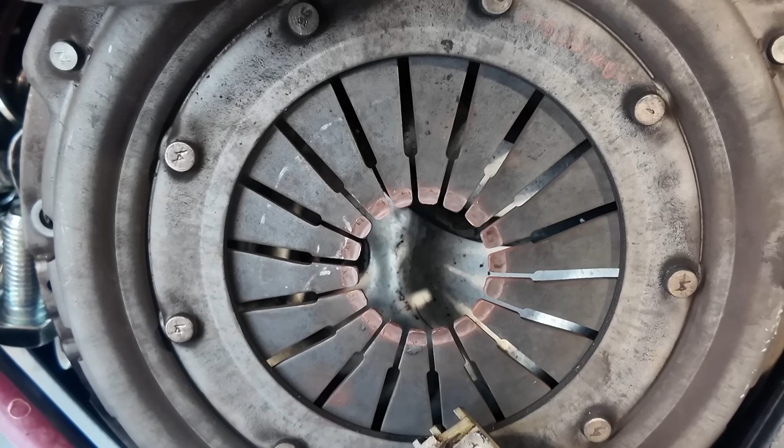So we looked into that, took the gearbox off, found that the release bearing had collapsed, and then it was putting uneven pressure on the cover plate. So I went down the lines of brand new clutch kit, new fork arm, new bushes, sweet as a nut now, so the customer's going to be well happy about that. That was one job this week.

So as you can see, the Lupo has finally moved off of the 2-poster ramp. The engine's in and she runs. Not so well, but that's only because we've got no boost pipes on, so there's a lot of unmetered air going around, so it doesn't like that, but it does run.

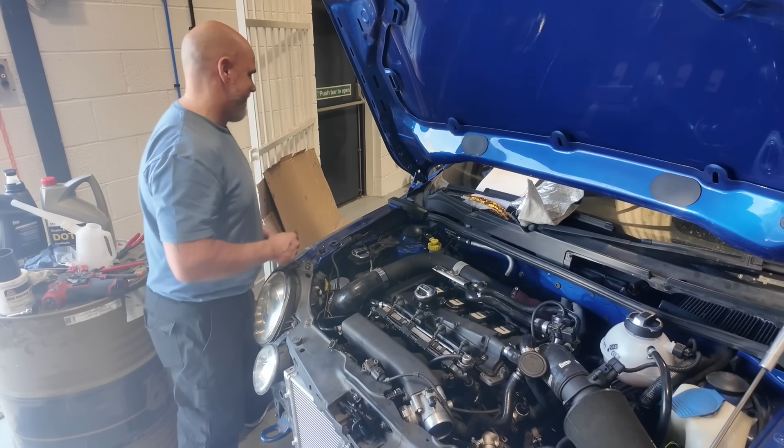Front end's on, alloy rad's on. We've had the front crash bar modified to house the intercooler. Because the radiator's that much thicker, it's pushed the intercooler out further, which has made it touch everything and rattle against everything. So we've modified the crash bar, reinforced the crash bar, and now the intercooler fits without touching anything.

Also, because of said radiator being larger, the old hard boost pipe that was going down here had about that big of a gap, and the boost pipe was just touching everything, rattling everything. I think it was an AliExpress special. So we've mocked up a nice custom shaped one. That is away being welded up.

So once that's all in, we should be able to put everything all together, run it up to temperature, and then we're not far off a road test.

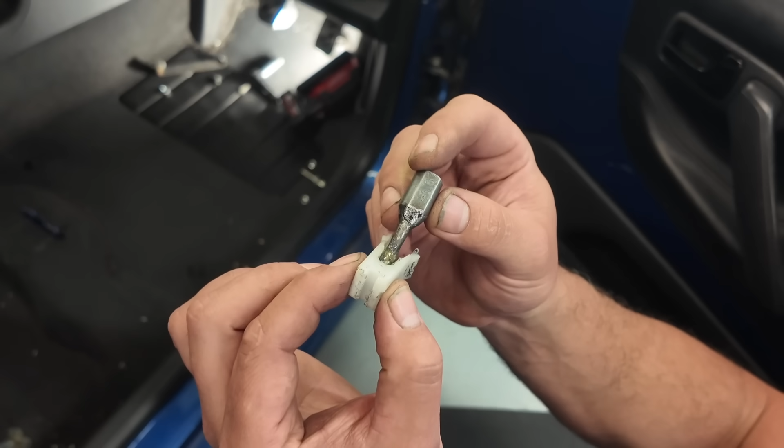I am currently in a driver's footwell having a nightmare trying to attach the clutch pedal to the clutch master. As you can see, I'm not the slimmest of guys, so yeah, it's a bit uncomfortable. All right, so anyway, excuse that clown.

So that's the update on the Lupo. It's just nice to see it all back together and off the ramp, if I'm honest. So yeah, I think that's pretty much all I've been doing this week.

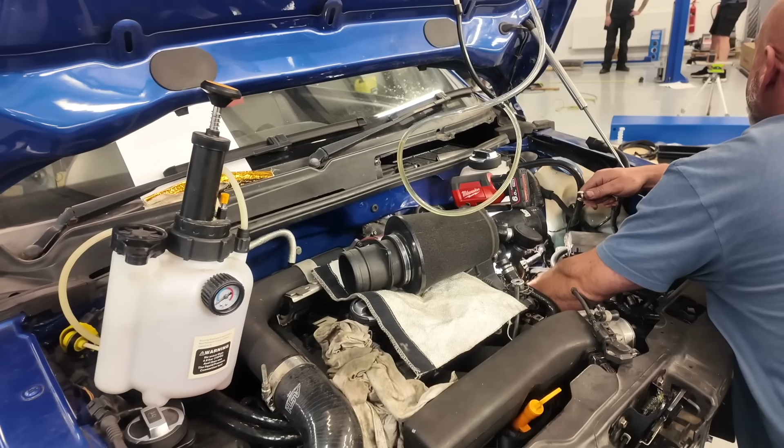So just a quick bit on the MGF. The customer dropped off a load of used parts for this. So we've got some stuff we can work through now, loads of stuff that's in better condition than what's on the car. We've made a decision pretty much that we're going to refurbish the original rear subframe.

It's not too bad, but we'll blast it. It has been slightly modified for the exhaust that's on the car as well.

And then we'll blast it, zinc metal spray, powder coat that, so basically lasts forever. James has done the seats for this, which you'll see in a couple of minutes, which is great, and the door cards - we've done some highlights on the door cards as well, so that's all coming along really nicely.

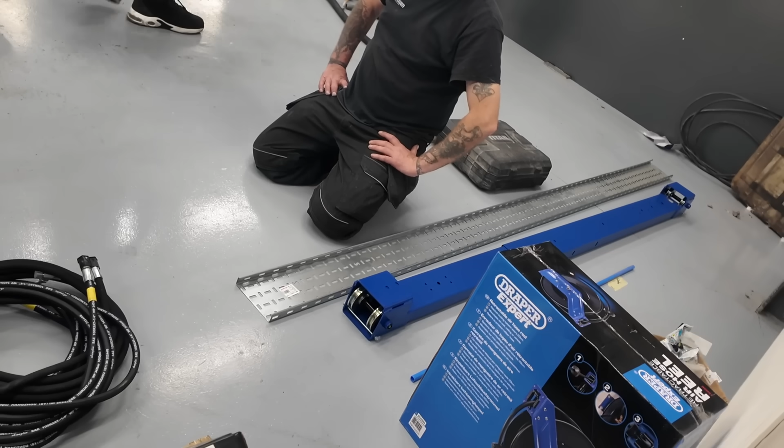The only other thing I'll quickly show you, which is quite exciting, is only just a couple of hours ago we had a new ramp delivered. So this is going to go in this area here. Martin and I are spending the next day or two just installing this, getting it bolted to the ground. We've got the electric feed pre-installed so we can connect that up. It's only single phase, nice and straightforward. We can get that signed off.

And actually what's kind of weird is even though we haven't done much different, it feels like we've got loads more workshop space, which is great because I think we're using this bay here a bit more constructively. I touched on before that we've taken out a bit of the mezzanine above just to allow a longer car - otherwise it would have been sort of small Minis and MG Metro Turbos on here only, which wouldn't have been ideal. I think that's it from me, and I'm going to hand upstairs to James.

Hi again, welcome back. This week we've been busy with the Mercedes 500, which is now stripped pretty much. The leather's here, so I'll be sending some of that off to Perth this week for the centres. Then Ellie will come in and hopefully cut and machine a lot of that. Should be pretty straightforward, it's just going black to blue.

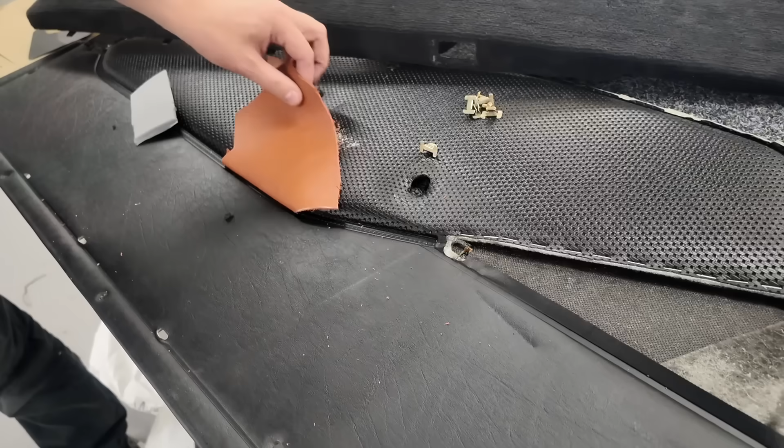The door cards are off, so I'll show you how I'm hopefully going to do the door cards in a minute maybe, and we'll crack on with that. Hopefully make some good progress on that next week.

The second Allegro - Ellie's bound that, so as soon as they're ready I can go over and put both carpets in. We've kind of held fire on putting the brown carpet in so far, just because Alex is climbing all over it at the minute getting it running, so it's probably better to wait so we don't make the carpet dirty basically. So probably maybe even do them both together.

And then mainly it's been the Quattro this week, so Ellie has done the centres on the seats in the Quattro material. She's got the lines to match up perfect, which is amazing because it's one of my favourite things to do as a trimmer, to get the fabric lining up perfect - and it's literally perfect, so that's great.

The dash is now back in. I was a bit worried about that with the flocking, having to sand it down trying to get it as smooth as possible, but I think it's come out really well, so happy with that. Glove box is back in.

I've made the patterns for the carpet, so we're going to make a press-stud section over the tunnel to try and hide some of the wires and everything, make it a bit more car-y. Put some mats in there so it's a bit more plush.

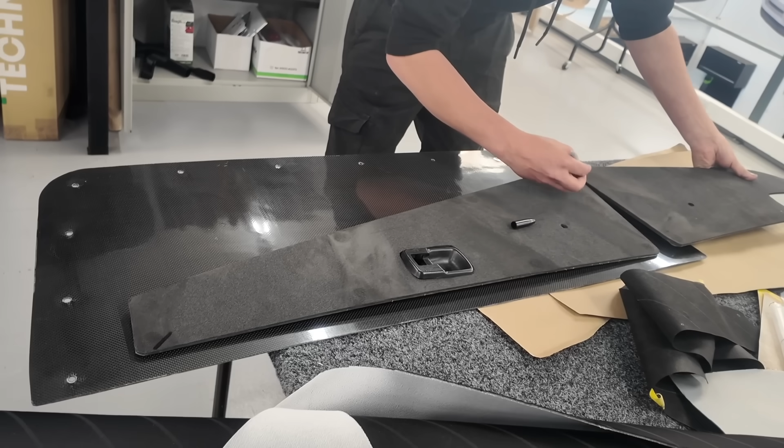The doors are back in, they look really good. So as you'll see on the video, I've done the shape to match the roll cage, so when the door's shut it lines up with the roll cage. That looks really good. That's in the same material as the seats.

And then I just need Luke to come over and scan a few bits for the headlining, and we're pretty much on top of that. That's pretty much 90% done, so yeah. Mainly next time you see me it'll be, hopefully, some parts fitted on the Merc, which will be really good. I'm really excited for that one, so I'll hand back.

All good? That is all good. Ready whenever you are, mate.

Well, thank you very much for that, James, and what a beautiful sunny day it is now. Yeah, there's Kuma waiting behind me, patiently waiting for collection.